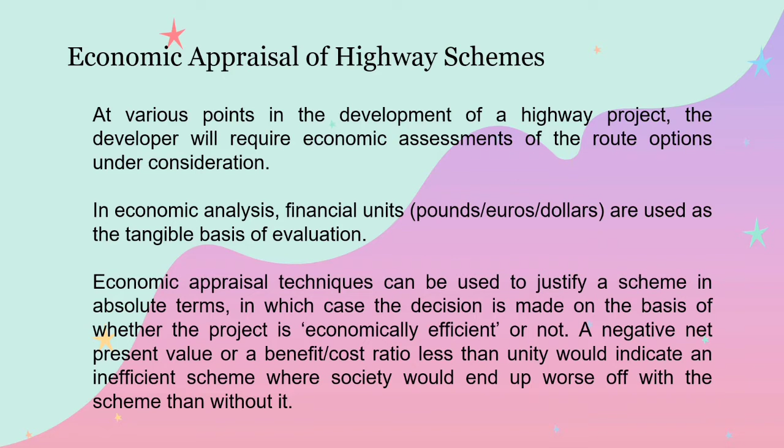I will be focusing on the economic appraisal of highway schemes. At various points in the development of a highway project, the developer will require economic assessments of the route option under consideration. In economic analysis, financial units like pounds, euros, and dollars are used as the tangible basis of evaluation. Economic appraisal techniques can be used to justify a scheme in absolute terms, where the decision is made on the basis of whether the project is economically efficient or not.

Cost-benefit analysis utilizes the net present value technique, where the costs and benefits of the scheme are discounted over time so that they represent present-day values. Using this method, any proposal having a positive net present value is economically sustainable in absolute terms.

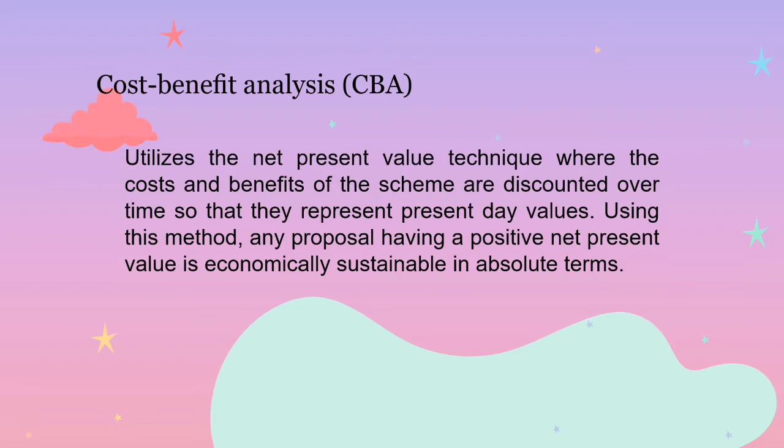Identifying the main project option. This is the fundamental step in the cost-benefit analysis process, where the decision makers compile a list of all relevant feasible options that they wish to be assessed. Finding sound feasible options is an important component of the decision process.

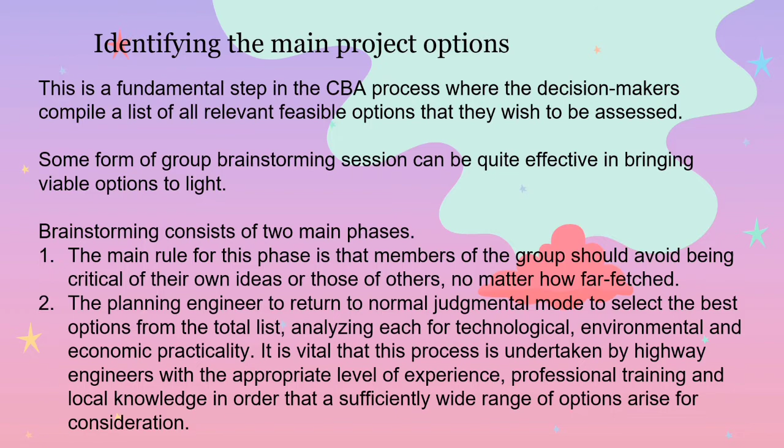Identifying all relevant costs and benefits. Many of the benefits of improvement to transport projects equate to a decrease in cost. One is the reduction in vehicle operating costs. If there's a newly upgraded project, it will lead to lower levels of congestion and higher speed than the already existing roadway.

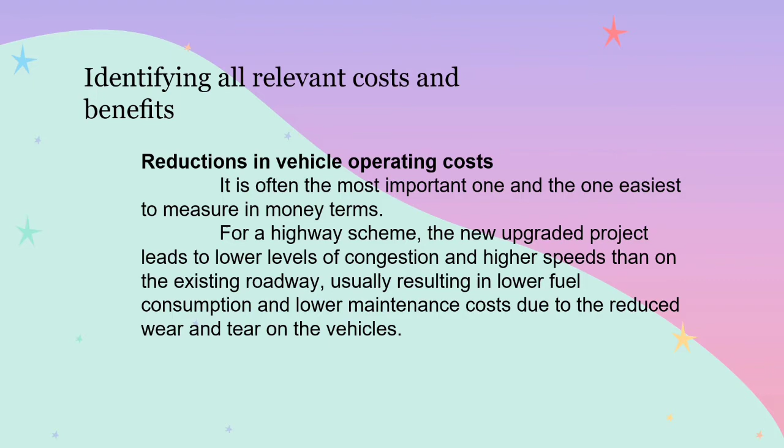This usually results in lower fuel consumption and lower maintenance costs due to reduced wear and tear of the vehicles. The second one is savings in time. A newly upgraded highway may reduce travel time and improve different travel services. The last one is the reduction in frequency of accidents. The cost for property damages, personal injuries, and fatal accidents may be reduced since there's already a new highway project.

Economic life, residual value, and discount rate. A highway project is often complex and long-term. A certain project has a time slot wherein you must finish that project at the given time, since there's already a cost and benefits estimated for that project.

The project may have to be assigned a substantial residual or salvage value, reflecting the significant benefits still to be accrued from the project, or conversely, costs still liable to be incurred by it. The other factor is the discount rate, which translates all costs and benefits to time equivalent values. It is a collective discount rate reflecting a project's benefits to a large number of people and spanning a time frame greater than one full generation.

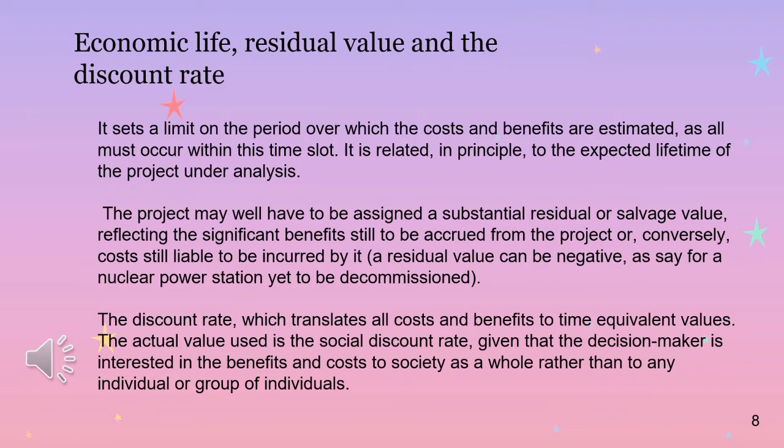Use of economic indicators to assess basic economic viability. There are three different techniques used to assess the economic viability. The first one is the net present value, which estimates the economic worth of the project in terms of the present worth of the total net benefits.

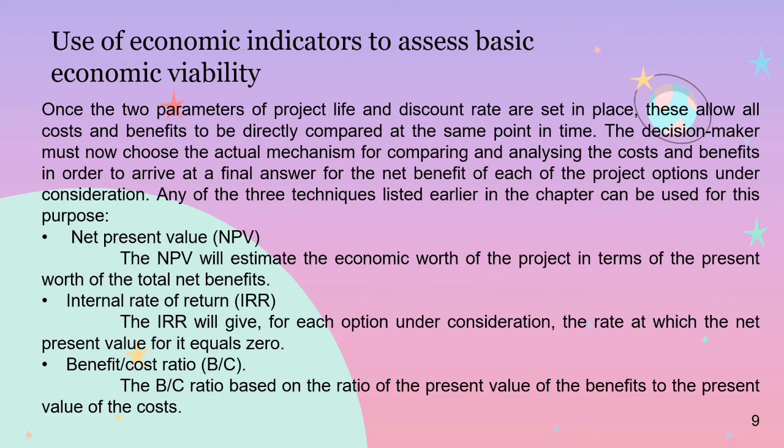The second one is the internal rate of return, which gives, for each option under consideration, the rate at which the net present value for it equals zero. The third one is the benefit cost ratio, which is based on the ratio of the present value of the benefits to the present value of the cost.

Advantages and disadvantages of cost-benefit analysis. Cost-benefit analysis is most suitable for ranking or evaluating different highway options rather than for testing the absolute suitability of a project. The advantage is the use of common units of measurement, money, which facilitates comparisons between alternative highway proposals and hence aids the decision-making process.

The other advantage is that it offers a broader perspective than a narrow financial or investment appraisal, concentrating only on the effects of the project on the project developers. The disadvantage is that if the decision was based on economic factors only, an incorrect decision may result from confusion of the original primary purpose of the proposed project.

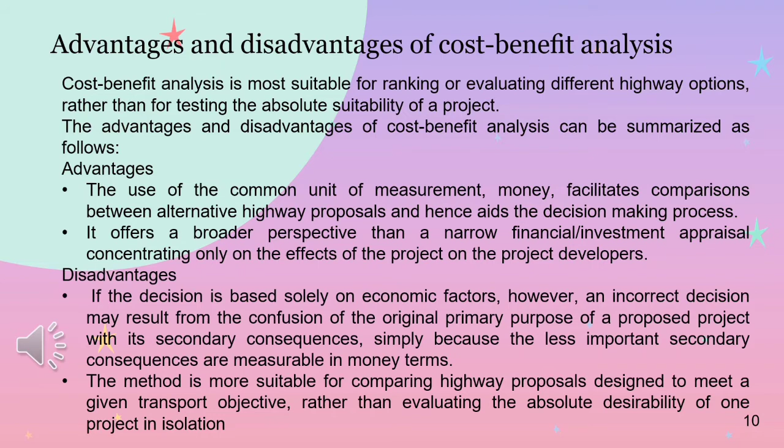The second disadvantage is that the method is more suitable for comparing highway proposals designed to meet a given transport objective, rather than evaluating the absolute desirability of one project in isolation.

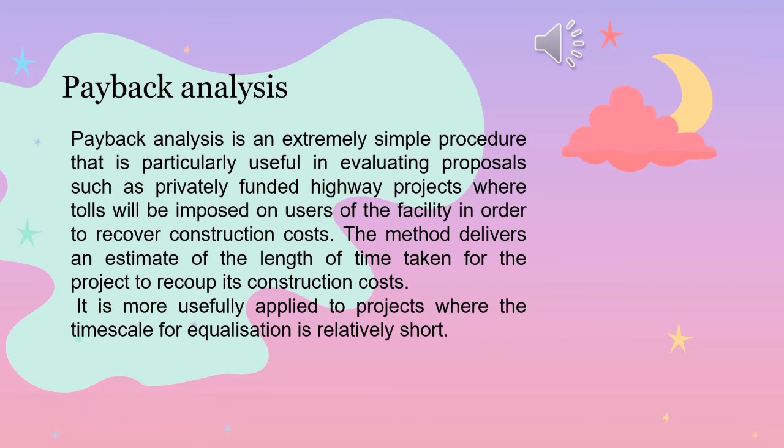Payback analysis. Payback analysis is an extremely simple procedure that is particularly useful in evaluating proposals such as privately funded highway projects, where tolls will be imposed on users of the facility in order to recover construction costs. It is more usefully applied to projects where the timescale for equalization is relatively short.

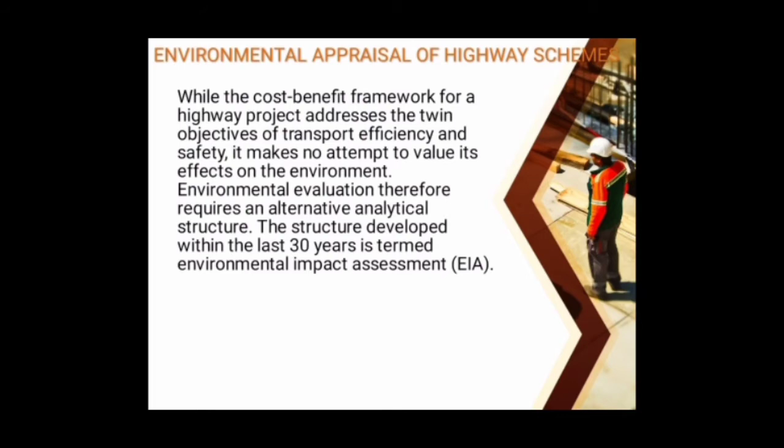The National Environmental Policy Act of 1969 requires the preparation of an Environmental Impact Statement, EIS, for any environmentally significant project undertaken by the federal government.

NEPA prescribes a format for the EIS requiring the developer to assess the probable environmental impact of the proposal, any unavoidable environmental impacts, alternative options to the proposal, short-run and long-run effects of the proposal and any relationship between the two, and any irreversible commitment of resources necessitated by the proposal.

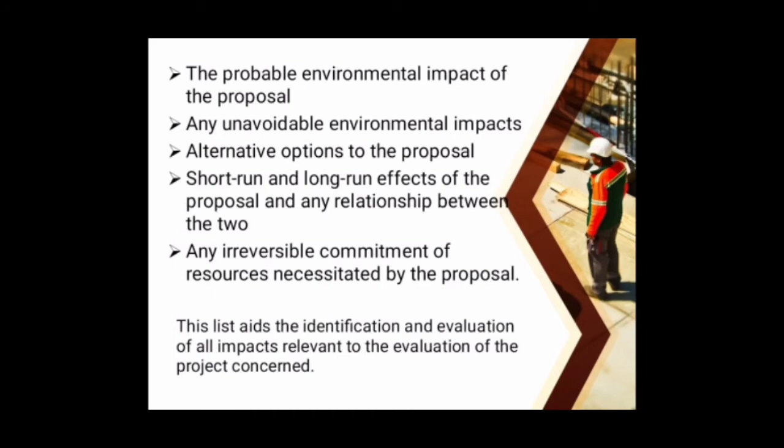The directive also details the minimum information that must be contained within the EIS. This includes: 1) a physical description of the project; 2) a description of measures envisaged to reduce or remedy the significant adverse environmental effects of the project; 3) the data required to both identify and assess the main effects on the environment of the project in question.

Within the UK, since 1993, the Design Manual for Roads and Bridges has provided the format within which the environmental assessment of highway schemes has taken place. It identified 12 environmental impacts to be assessed for any new or improvement trunk road proposal. So in 1993, the UK proposed a new format, identifying 12 environmental impacts that need to be considered when building roads and bridges.

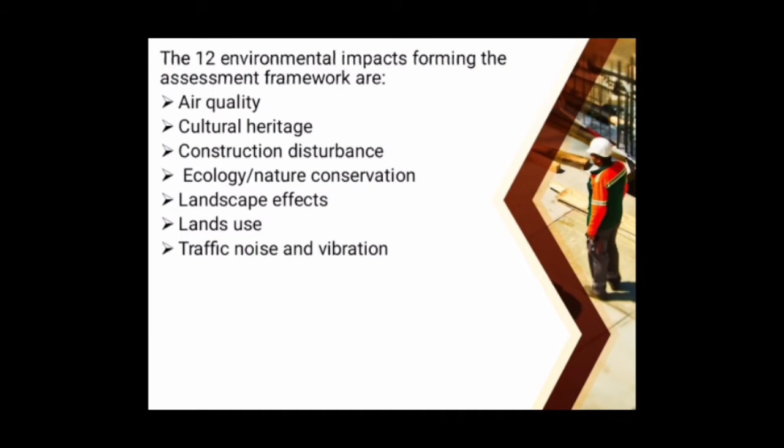These are the 12 environmental impacts that should be considered when designing roads and bridges within the environment: 1) air quality, cultural heritage, construction disturbance, ecology and nature conservation, landscape effects, land use, traffic noise and vibration, pedestrian, cyclist and community effects, vehicle travelers, water quality and drainage, geology and soil, policies and plans.

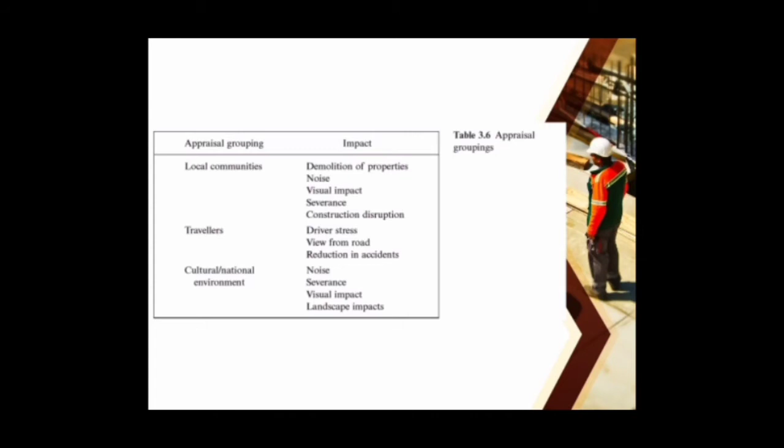So what we can see here is Table 3.6, Appraisal Groupings. These are the appraisal groupings: local communities, travelers, cultural/national environment. This is the impact on them - demolition of properties, noise, visual impact, severance, etc.

The new approach to appraisal, NATA. During the late 1990s, the UK government reviewed its road program in England and identified those strategically important schemes capable of being started within the short to medium term, and listed them as potential candidates for inclusion within a targeted program. This appraisal summary table, AST, is designed for presentation to those decision makers charged with determining whether approval for construction should be granted, and if so, what level of priority should be assigned to it.

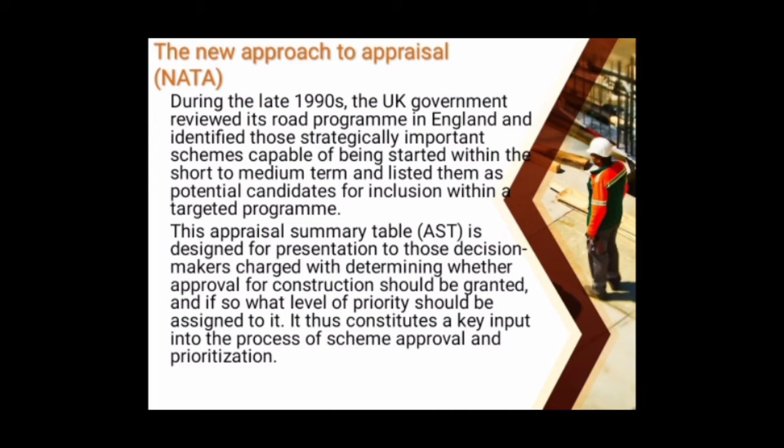It thus constitutes a key input into the process of scheme approval and prioritization. The AST summarizes the assessment of the scheme in question against 5 objectives and their constituent impacts, seen by the government as central to transport policy: environmental impact (noise, air impacts, landscape, biodiversity, heritage, water), safety, economy (journey times, cost, journey time reliability, regeneration), accessibility (pedestrian access, access to public transport, community severance), and integration.

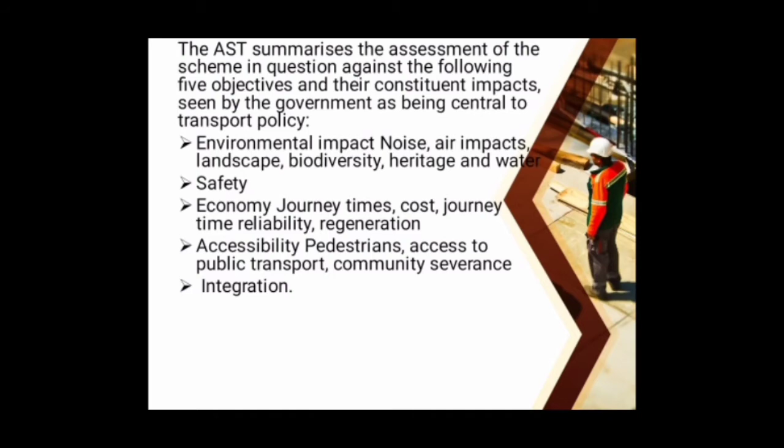Topic 2: basic elements of highway traffic analysis. The functional effectiveness of a highway is measured in terms of its ability to assist and accommodate the flow of vehicles with both safety and efficiency. In order to measure its level of effectiveness, certain parameters associated with the highway must be measured and analyzed.

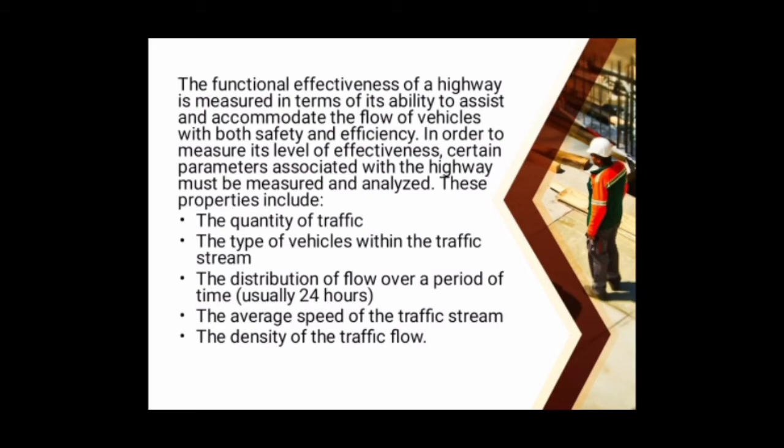These properties include: 1) the quantity of traffic, the types of vehicles within the traffic stream, the distribution of flow over a period of time, usually 24 hours, the average speed of the traffic stream, and the density of the traffic flow - speed, flow, and density of a stream of traffic.

As we can see, equation 1 is Q equals N over T, wherein Q is a measure of the volume of traffic on a highway. In general terms, Q is expressed in vehicles per unit time.

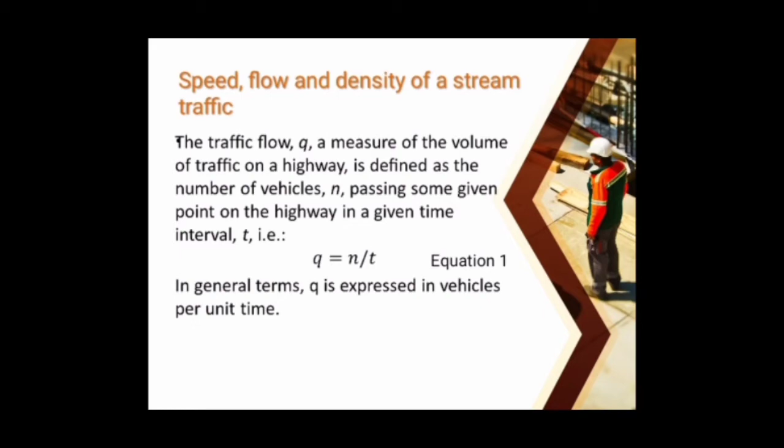The number of vehicles on a given section of highway can also be computed in terms of the density or concentration of traffic as follows: K equals N over L, where the traffic density K is a measure of the number of vehicles N occupying a length of roadway L.

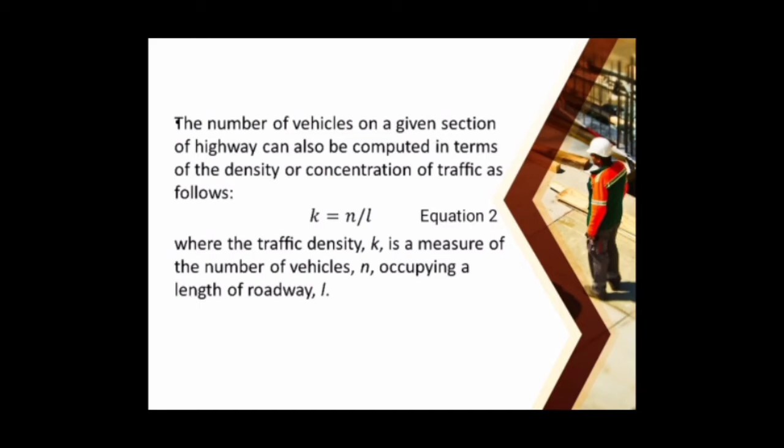For a given section of road containing K vehicles per unit length, the average speed of the K vehicles is termed the space mean speed, U.

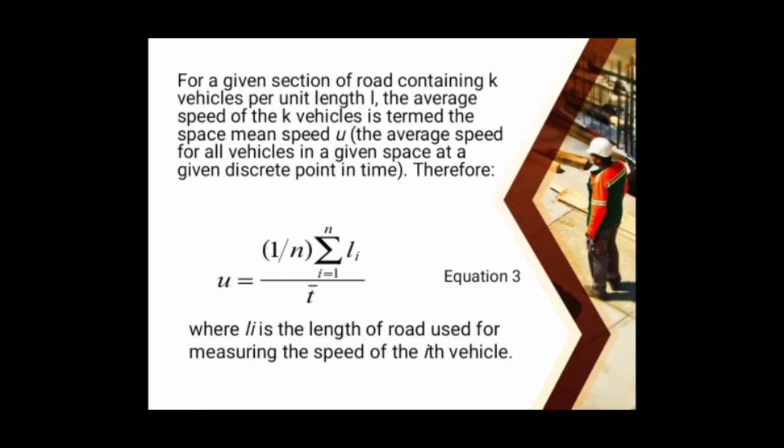This equals L over T, which equals U, shown as equation number 4. Thus, the three parameters U, K, and Q are directly related under stable traffic conditions: Q equals UK. This concludes the basic relationship between traffic flow, space mean speed, and density.

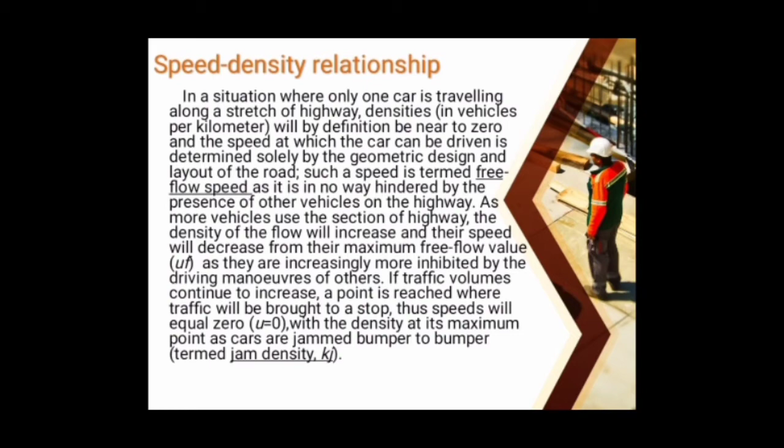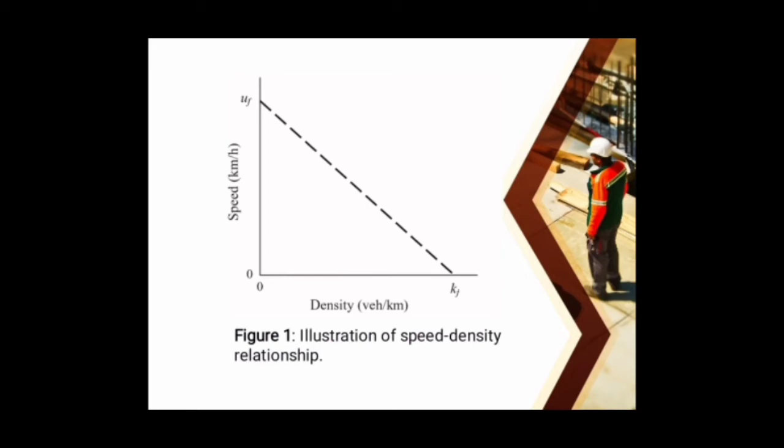Speed-density relationship: in a situation where only one car is traveling along a stretch of highway, density will, by definition, be near zero. As we see in figure 1, this illustrates the speed-density relationship. Along the x-axis we see density as vehicles per kilometer, and on the y-axis, speed in kilometers per hour.

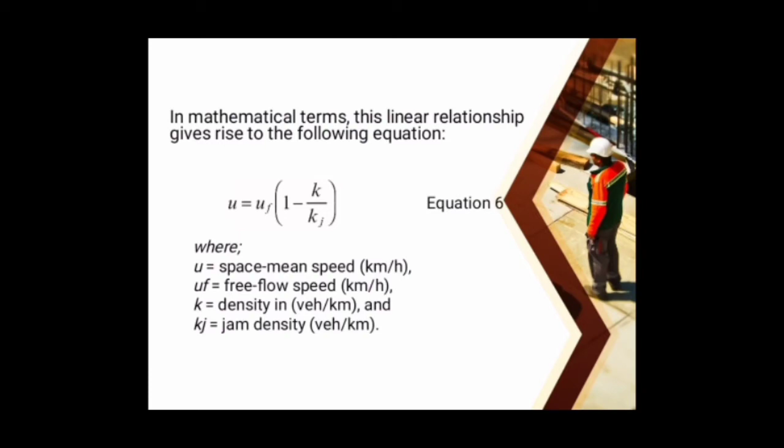In mathematical terms, this linear relationship gives rise to the following equation: U equals UF times (1 minus K over Kj), where U is the space mean speed, UF is the free flow speed, K is the density, and Kj is the jam density.

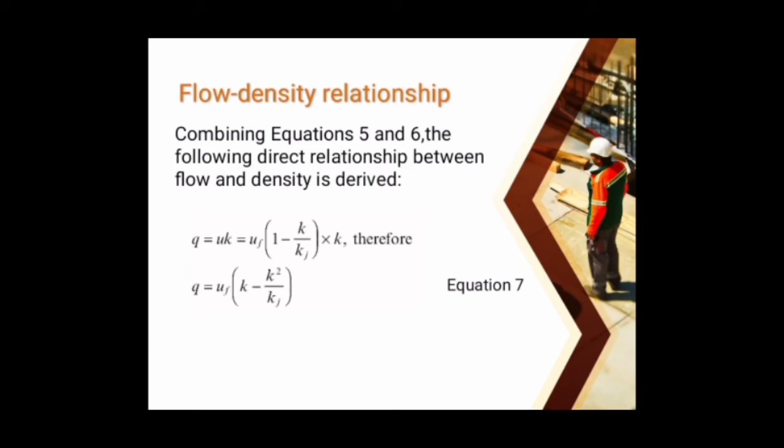Flow-density relationship: combining equations 5 and 6, the following direct relationship between flow and density is derived. Q equals UK, equals UF times (1 minus K over Kj) times K. Therefore, Q equals UF times K minus K squared over Kj, shown as equation number 7.

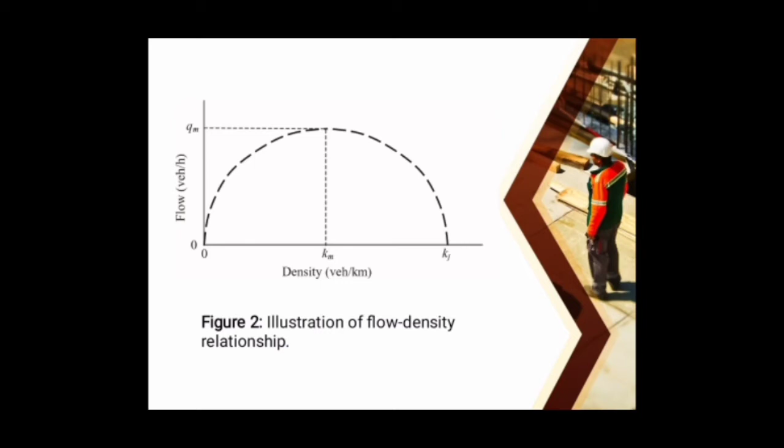Figure 2 shows the illustration of the flow-density relationship. As we can see, it forms a semicircle. In order to establish the density at which maximum flow occurs, equation 7 is differentiated and set equal to 0, as follows: dQ over dK equals UF times (1 minus 2K over Kj), equals 0.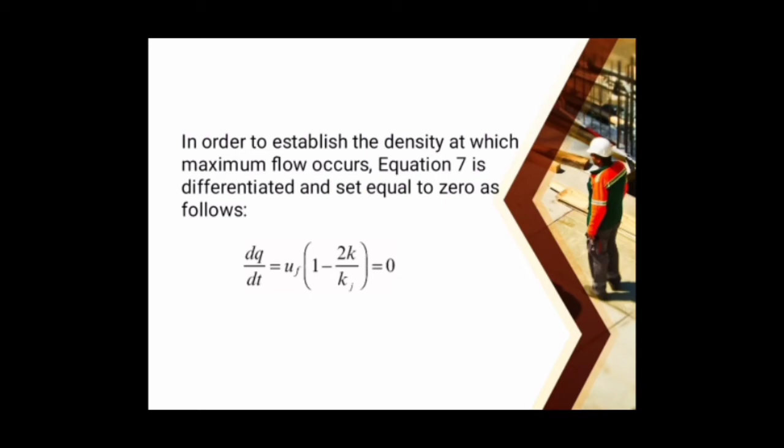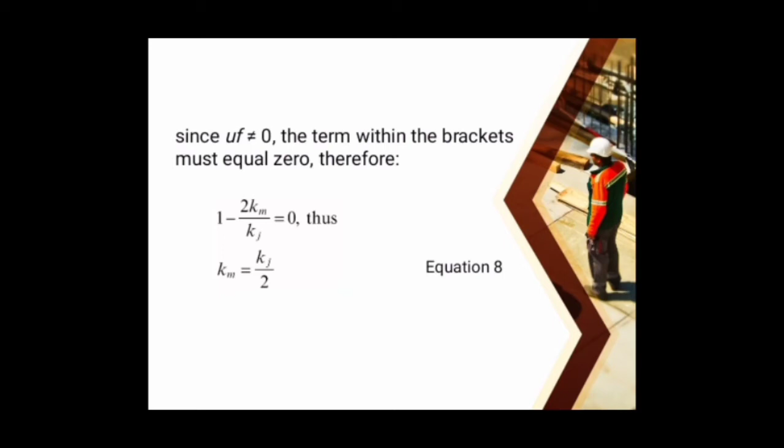Since UF is not equal to 0, the term within the bracket must equal 0. Therefore, 1 minus 2Km over Kj equals 0. Thus, Km equals Kj over 2, shown as equation number 8.

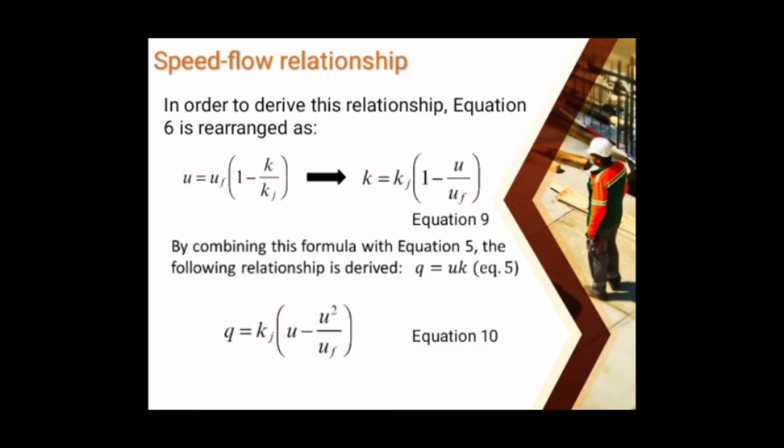Speed-flow relationship: in order to derive this relationship, equation 6 is rearranged as K equals Kj times (1 minus U over UF), shown as equation number 9. By combining this formula with equation 5, the following relationship is derived: Q equals UK, so Q equals Kj times U minus U squared over UF, shown as equation number 10. This relationship is again parabolic in nature.

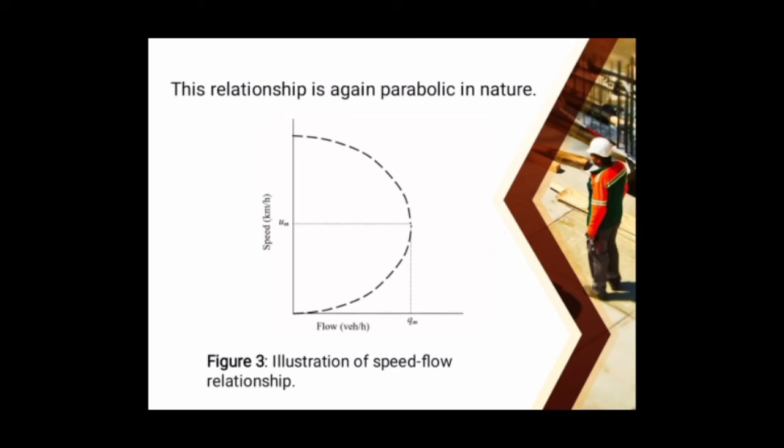As we can see, figure 3 illustrates the speed-flow relationship. In order to find the speed at maximum flow, equation 10 is differentiated and set equal to 0: dQ over dU equals Kj times (1 minus 2U over UF), equals 0.

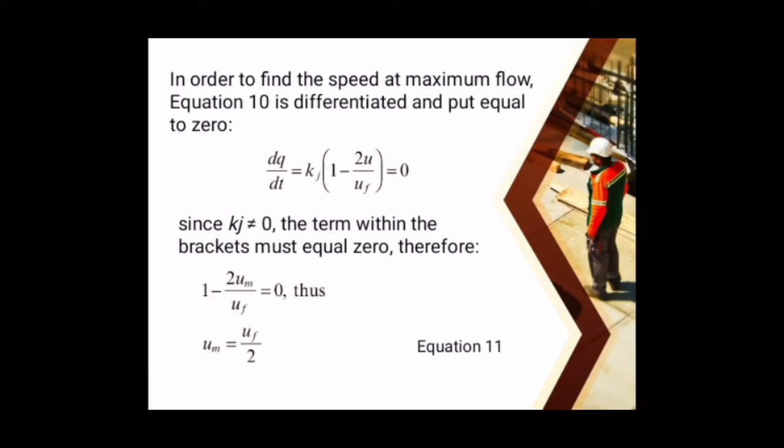Since Kj is not equal to 0, the term within the brackets must equal 0. Therefore, 1 minus 2Um over UF equals 0. Thus, Um equals UF over 2, shown as equation 11. The speed at maximum flow is thus equal to half the free flow speed, UF, and its location is shown in figure 3.

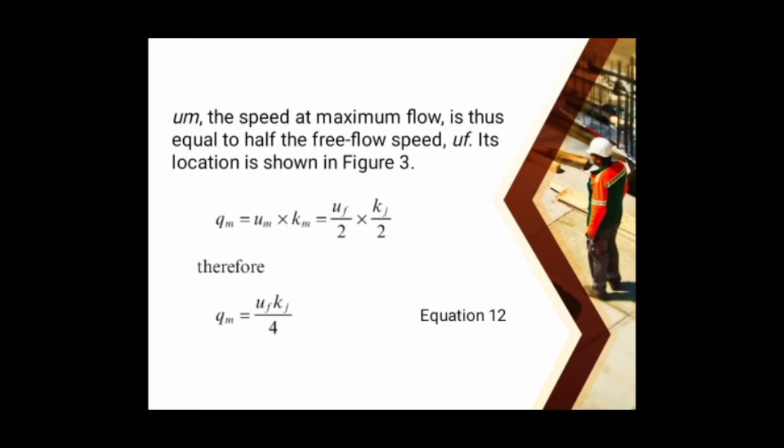Qm equals Um times Km equals UF over 2 times Kj over 2. Therefore, Qm equals UF times Kj over 4, shown as equation 12.

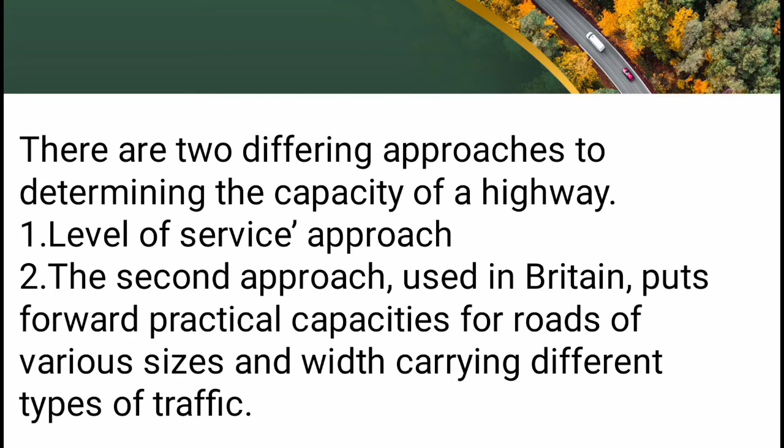Good morning everyone. My topic will start with the determination of the capacity of a highway. In determining the capacity of a highway, we have two different approaches. One is the level of service approach, and the second approach, mostly used in Britain, puts forward practical capacities for roads of various sizes and widths carrying different types of traffic.

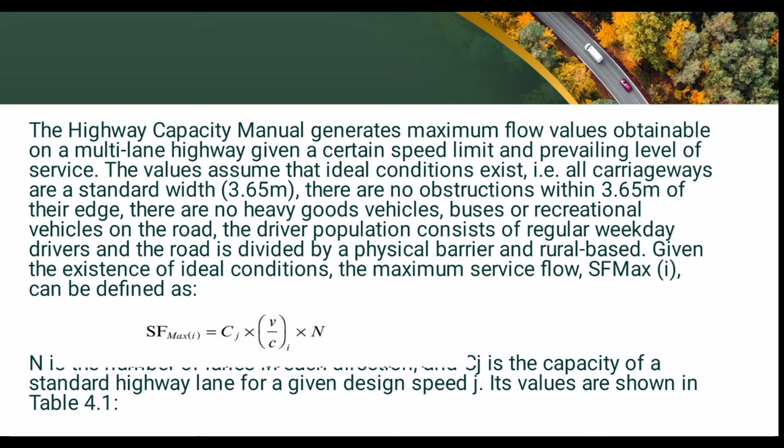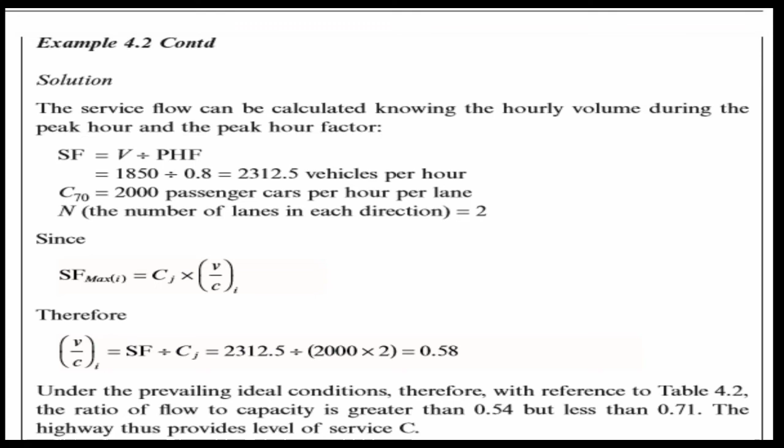Let us have an example. So given doon sa example, yung value ng V at saka PHF. So kukunin natin yung service flow, then makakakuha tayo ng 2,312.5 vehicles per hour. Then mula doon, kukunin natin yung maximum service flow by inputting this in the formula. Then makukuha na natin yung level of service na provide ng highway.

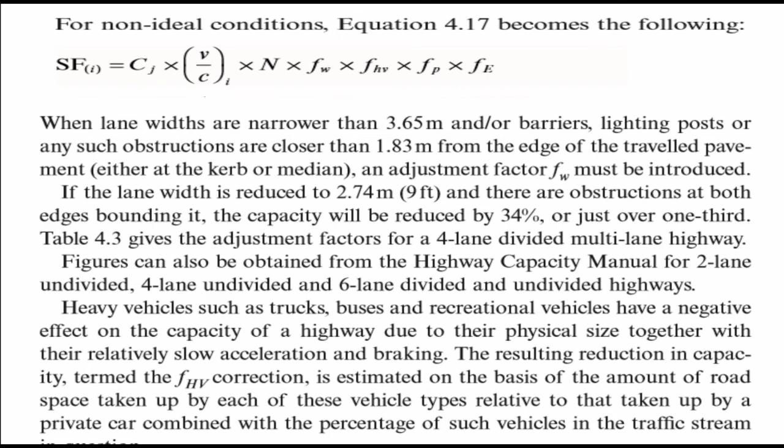Sa non-ideal conditions naman, nagkakaroon tayo ng mga adjustment factors such as fW, fHV, fP, and fE. Ito yung kapag lumampas na sa given na conditions. Halimbawa, nag-set tayo ng 3.65 meters as standard. Then, yung lane widths ay naging narrower or mas greater dun sa 3.65. So, nagkakaroon na tayo ng adjustment factor. So, makikita sa table yung mga correction factors para sa non-ideal lane widths and clearances para sa obstruction.

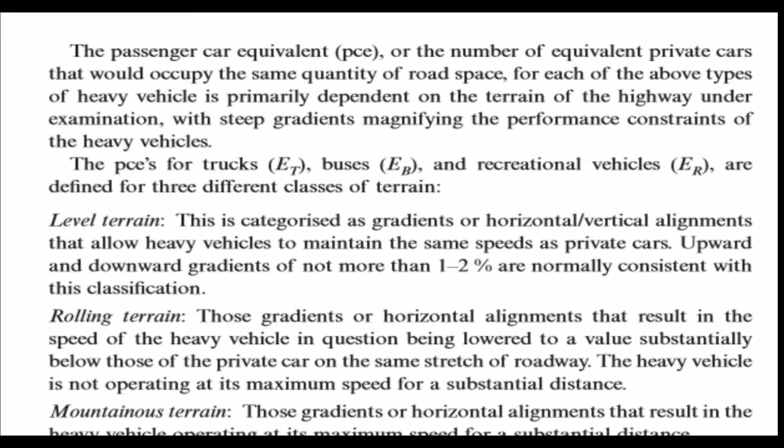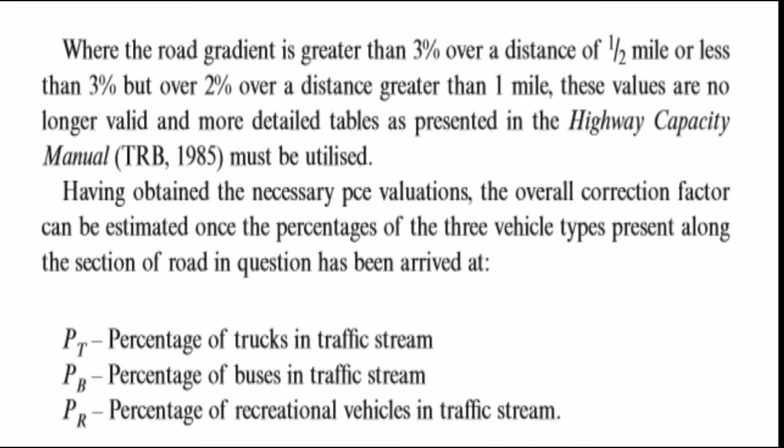So, isa pang nakaka-apekto sa passenger car equivalent ay yung 3 different class ng terrain: level, rolling, at mountainous terrain. So, meron din ako ditong table na may correction factor na equivalent ng passenger car para sa different classes of heavy vehicles. So, kapag na-obtain na natin yung necessary PCE, nagkakaroon na tayo ng overall correction factor. So, magkakaroon tayo ng formula na fHV is equal to 1 over 1 plus PT times (ET minus 1) plus PB times (EB minus 1) plus PR times (ER minus 1).

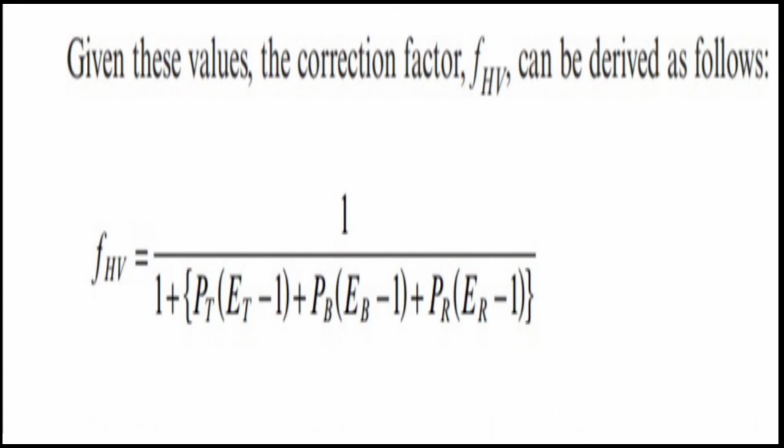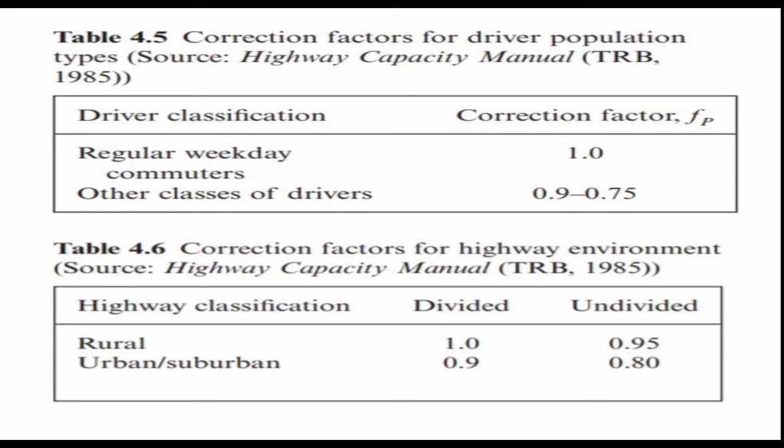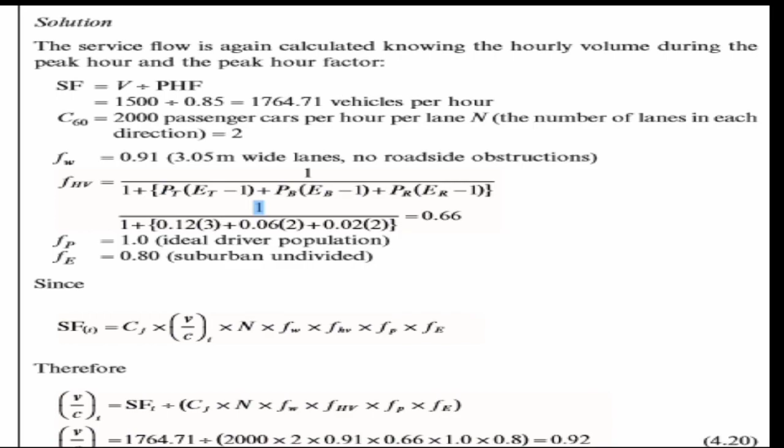Itong dalawang table na ito, nagpapakita naman ng correction factors para sa driver population types at para sa highway environment. So, ito yung ginagamit kapag nagdedetermine na tayo sa problem. Sa example problem, given yung PT, PB, at PR, i-input natin sa formula ng service flow. Then, ililipat natin doon sa formula na na-arrive natin kanina. Then, makukuha na natin yung level of service na in-offer nung section ng highway na yon.

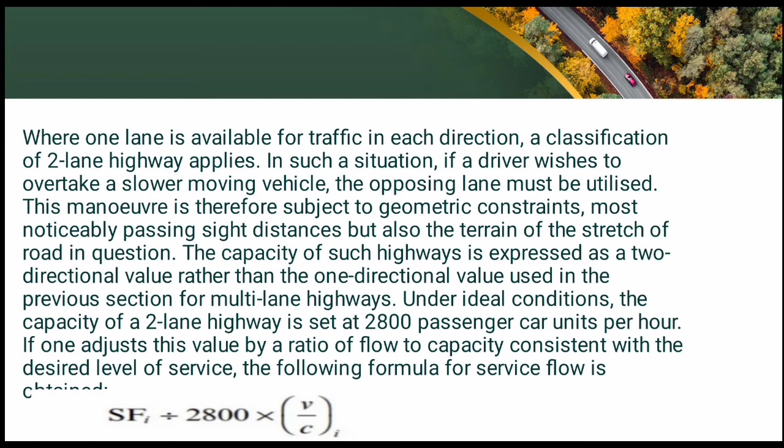Another topic is the maximum service flow rates for 2-lane highways. So, meron tayo ditong formula na SF = 2800 times V/C. Meron din tayong mga ideal conditions na sinusunod. Meron tayong 7 conditions. Then, let us proceed with an example.

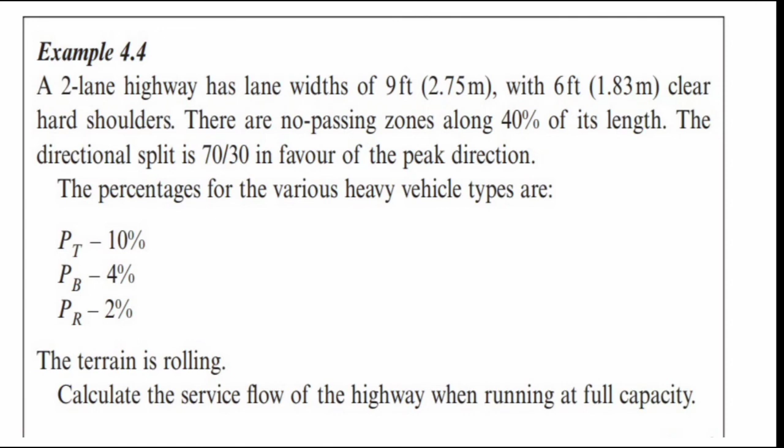So, from the problem, given yung PT, PB at PR, then yung terrain is rolling. So by substituting the value sa formula kanina, yung value ng fHV, makukuha natin 0.657. Then ilalagay natin siya doon sa formula na may adjustment factor para sa non-ideal conditions. Then mag-a-arrive tayo sa answer na 1145 veh/h.

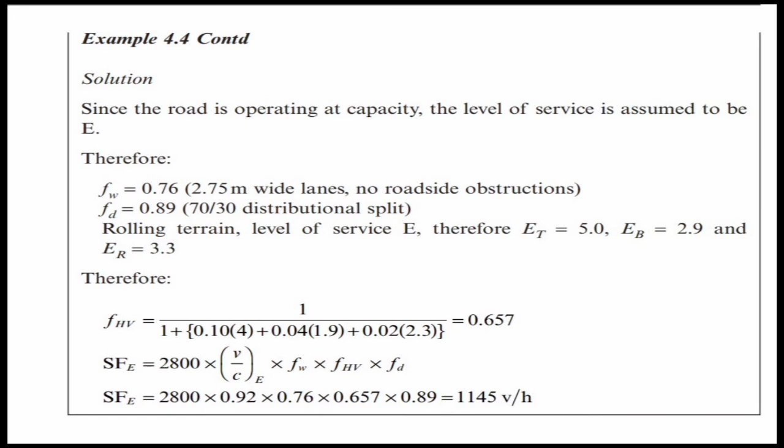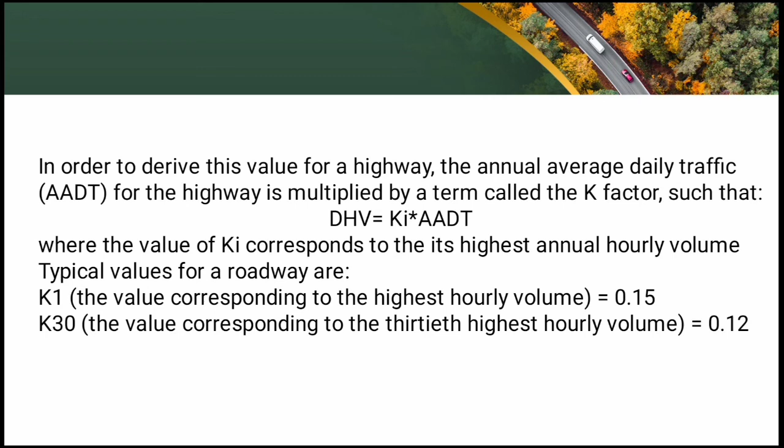Our topic is about sizing a road using the highway capacity manual approach. So dito nagkakaroon tayo ng formula na DHV is equal to K times AADT, where K corresponds to its highest annual hourly volume. So since yung DHV is a two-directional flow, yung directional design hourly volume ay ma-estimate o ma-obtain natin by multiplying it to the directional factor D and also to the value of K. As we will have the formula DDHV is equal to K times D times AADT.

Another example. So para sa solution nito, gagamitin natin yung formula na DDHV is equal to K times D times AADT. So since given naman yung mga value, i-input lang natin. Then makukuha na natin yung value which is 2880 veh/h. So yung V ay yung hourly volume.

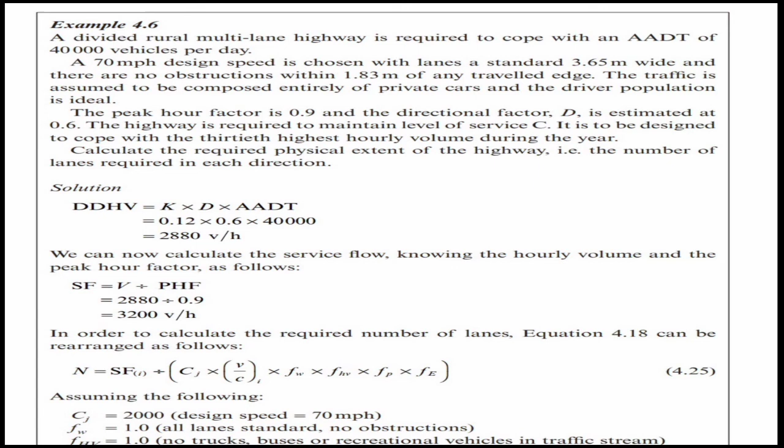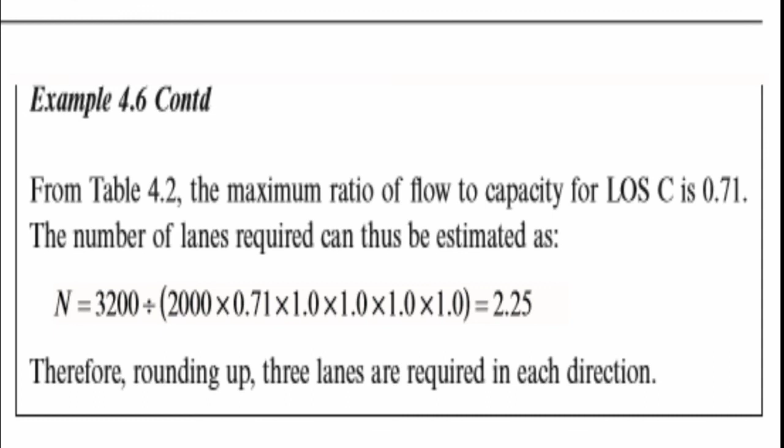I-input naman natin para makuha natin ang service flow given the PHF or the peak hour factor. Then i-input natin doon sa non-ideal condition kanina na merong mga adjustment factor. Then makukuha na natin yung tinatanong which is the required physical extent of the highway.

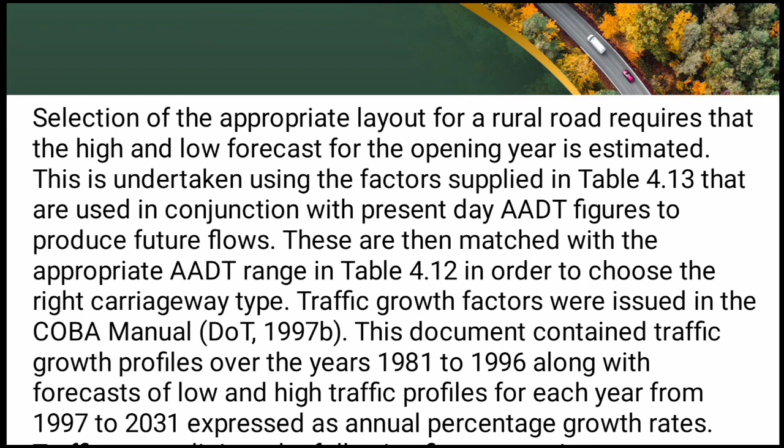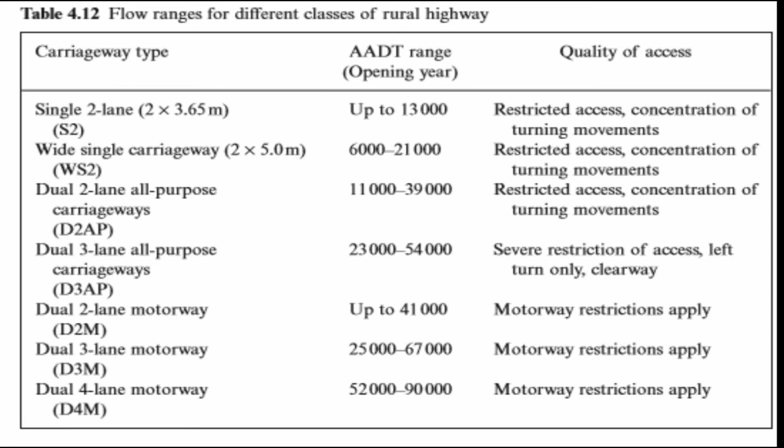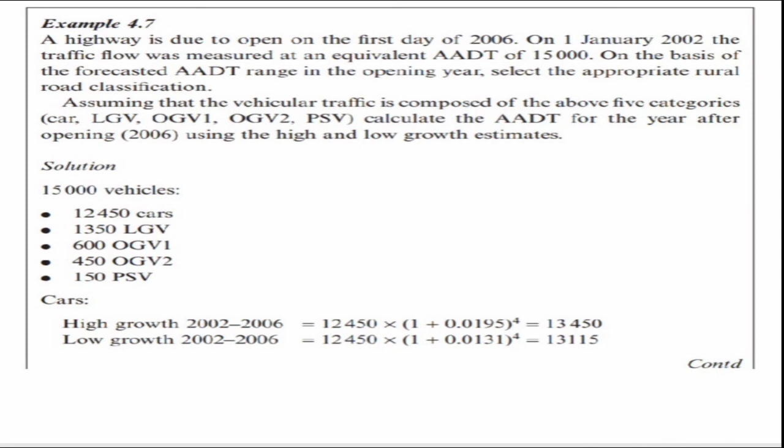So, mag-solve tayo ng problem. Given dun sa problem na meron daw tayong 15,000 vehicles: 12,450 cars, 1,350 LGV, OGV1 ay 600, OGV2 ay 450 at PSV ay 150. So, kukunin natin yung high growth at low growth sa pagitan ng 2002 to 2006 doon sa 5 categories: cars, LGV, OGV1, OGV2 at PSV.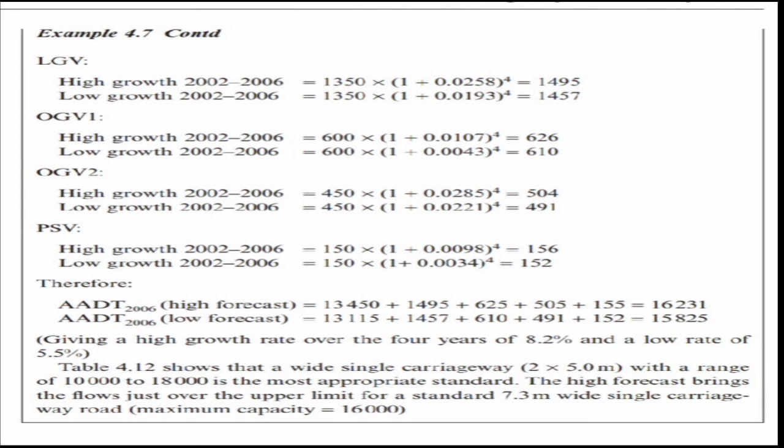Pagkatapos nun, madedetermine natin at isa-select natin doon sa table kung ano ang appropriate. Sa case na ito, since yung high growth rate over the 4 years ay 8.2% at ang low rate ay 5.5%, ang wide single carriageway na 2 by 5.0 meters na nag-range from 10,000 to 18,000 ang most appropriate standard.